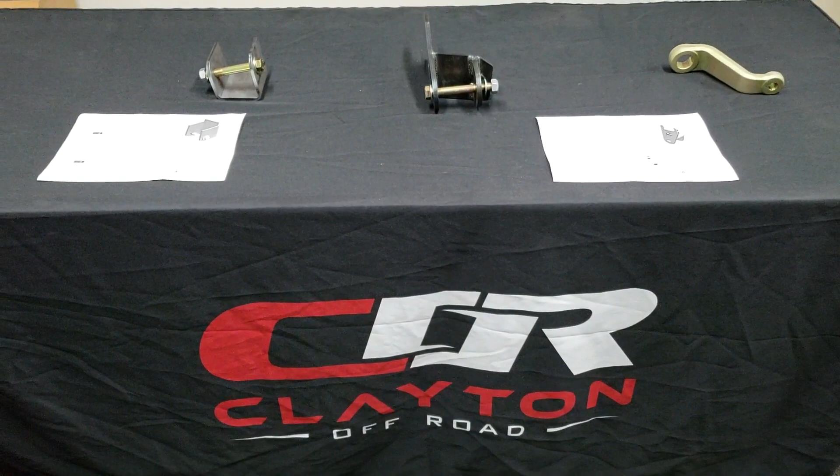How's it going, guys? Adam from Clayton Off-Road, and today we're going to show you our two available track bar brackets for the Jeep Wrangler TJ or LJ.

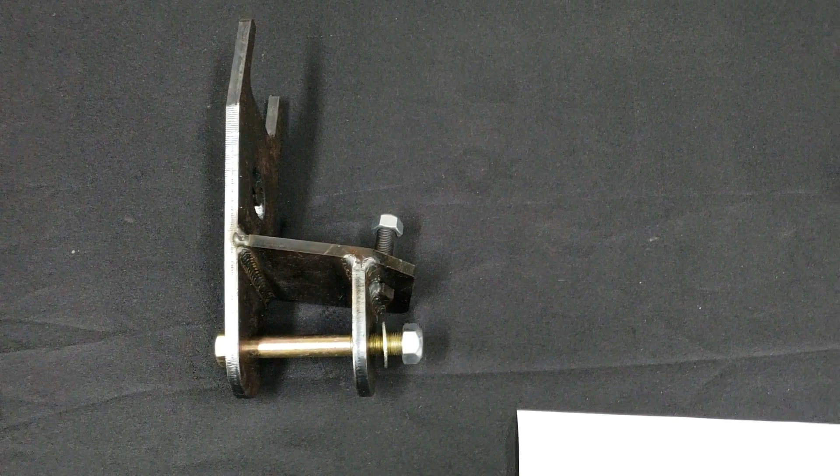So on the right here is our track bar bracket. The part number is 4500420. This is a 5/16 laser cut bracket.

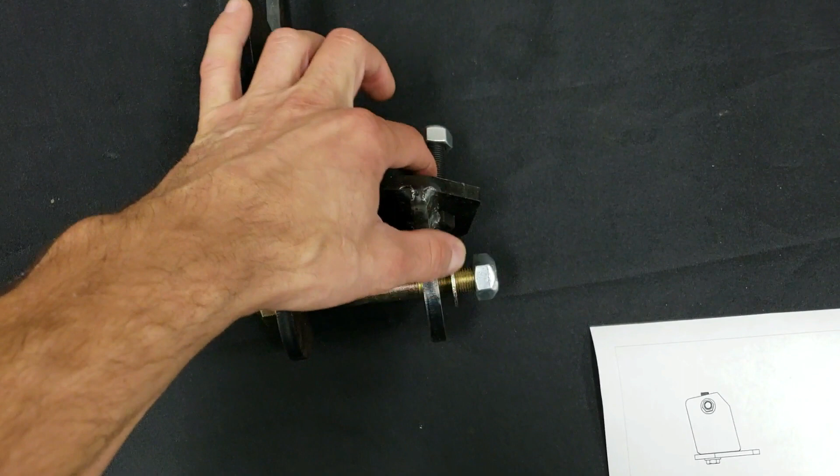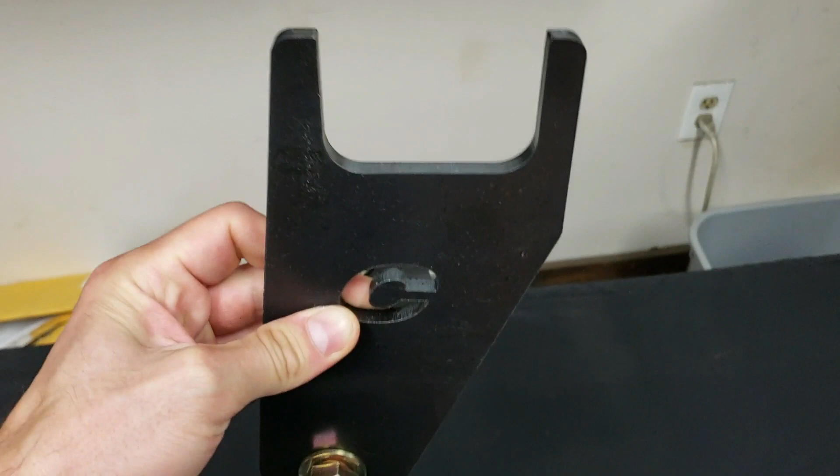It does bolt into the factory location, but this is a weld-in bracket. So this bolts in here for alignment purposes, and then this notch out will wrap around the frame. If you're looking at the front of the vehicle, it'll end up being installed like that. Basically you bolt it in, snug up that bolt, and then it should be welded around the factory cast part, and then around the frame inside and outside.

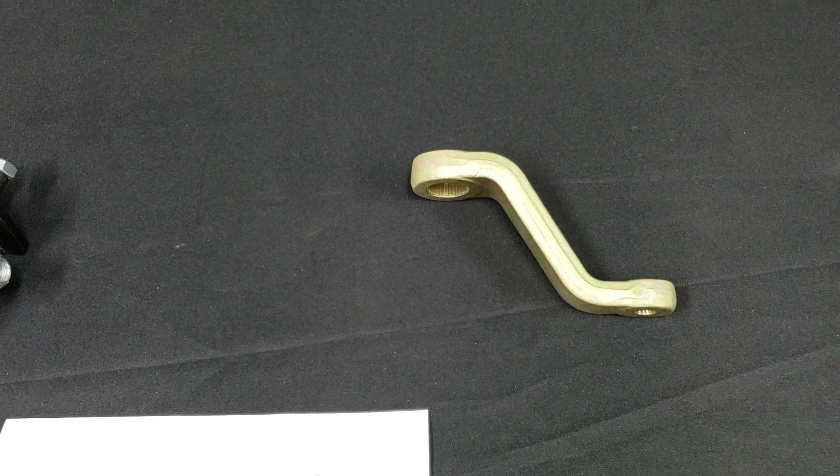It's designed to use 2.5-inch forged Johnny joints, 9/16 through bolt. Basically, you can use it with our part number 4500200. When you do a track bar drop bracket, so this does lower the location, we also recommend using a drop pitman arm. The drop pitman arm part number is 2400100.

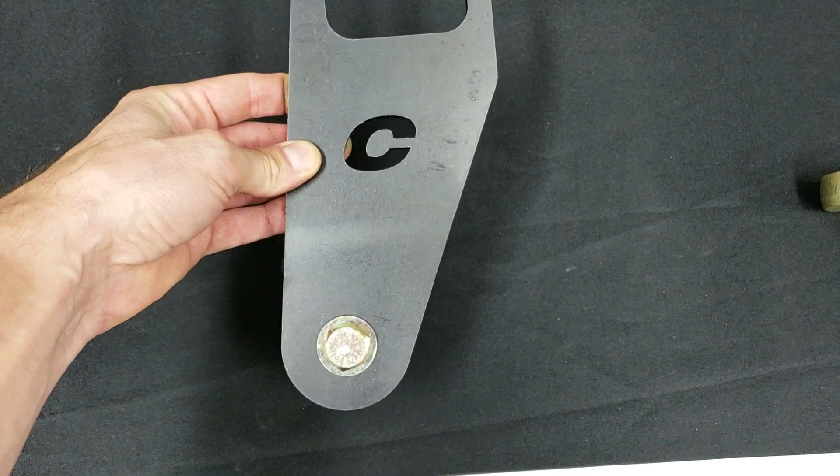This drawing is available on our website. It gives you some more details, dimensions, but it's just a very sturdy bracket for the TJ or LJ to help lower the track bar location and flatten out your track bar and steering angles.

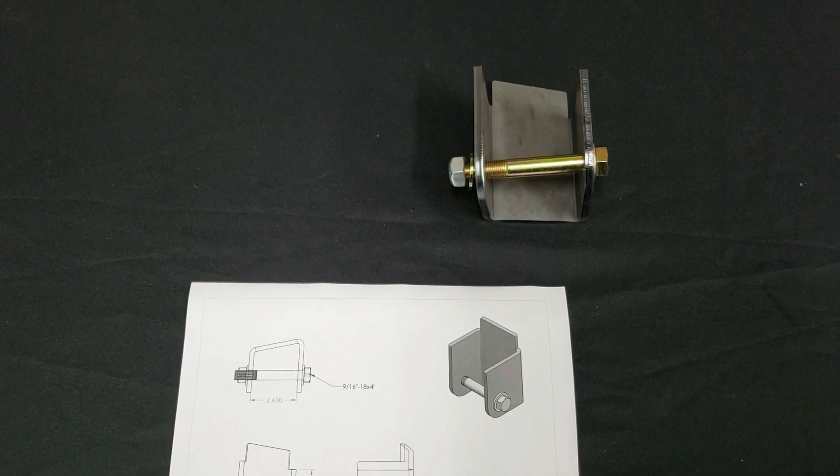Now this is our TJ bracket. This does not lower the location. This is more of a custom setup we did a few years back. This works great for customers running much larger axles, Dana 60s, 9 inches, something like that, or a lot less lift. So this is more of a simple 1/4-inch bracket.

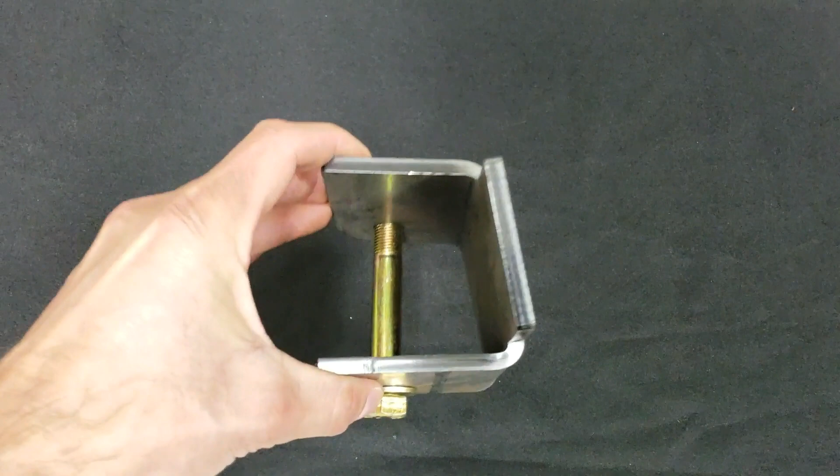It's properly angled, so it will sit nicely on the bottom of the frame rail there and follow the angle down. But this one actually has you cut off the factory cast mount and moves everything up as high as you can. It still uses that 2.5-inch forged Johnny joint, but this is more of a custom builder application, so you can slide that thing up and down the frame.

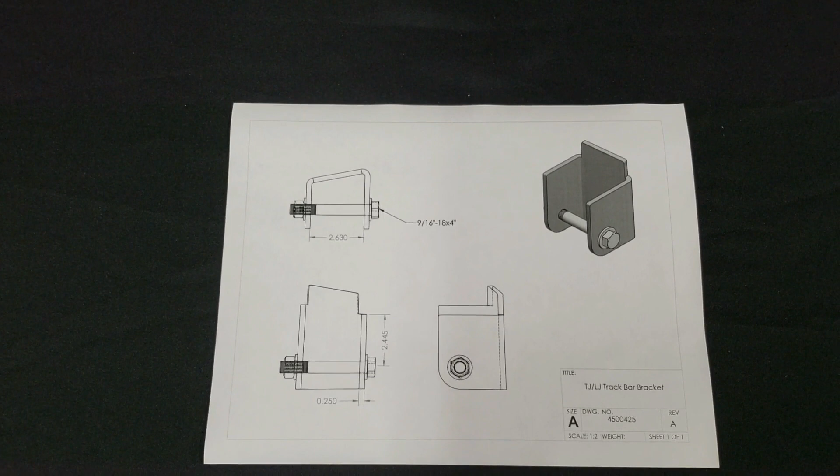And then most of the time we suggest using one of our custom track bars, because at that point, if you're doing a custom Dana 60 or 9-inch, there's different widths and lengths and heights, angles depending on your steering. So it's just a simple place to start to get you a nice bracket on the frame.